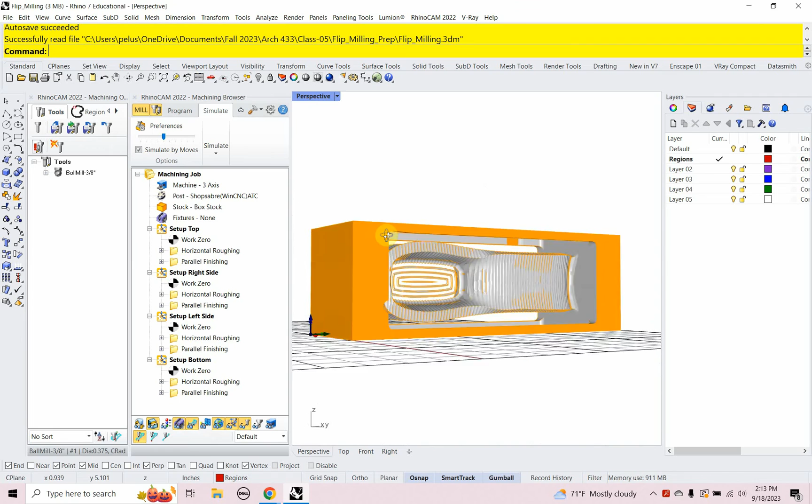Today we're going to look at RhinoCAM flip milling, and we're going to flip mill all four sides of this piece of stock. We're going to be thinking about using foam to mill this wonderful piece out of. So if you don't have a robot arm that has 6-axis capability, you can use this tutorial to flip mill and get all around. Is it 12 axis? Maybe it is 12 axis.

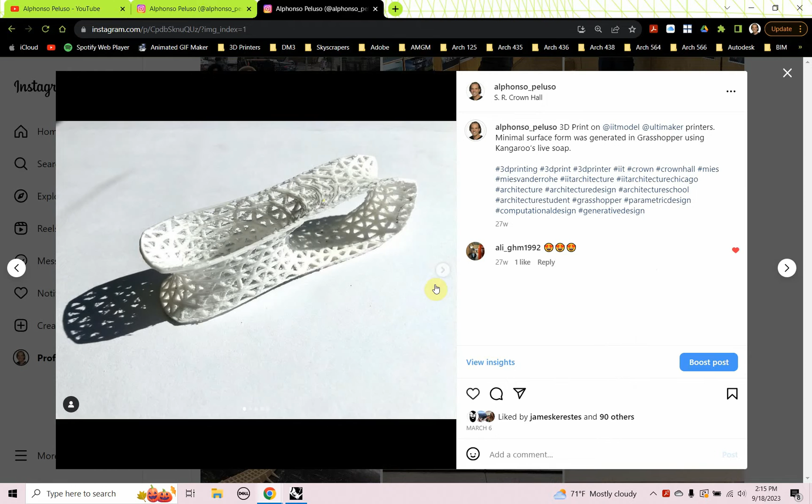Okay, so my inspiration for today was a 3D print I made last spring of a live soap surface that I made in Grasshopper and Kangaroo. So that's the surface that we're going to look at milling out, minus the triangles. All right, let's jump into it.

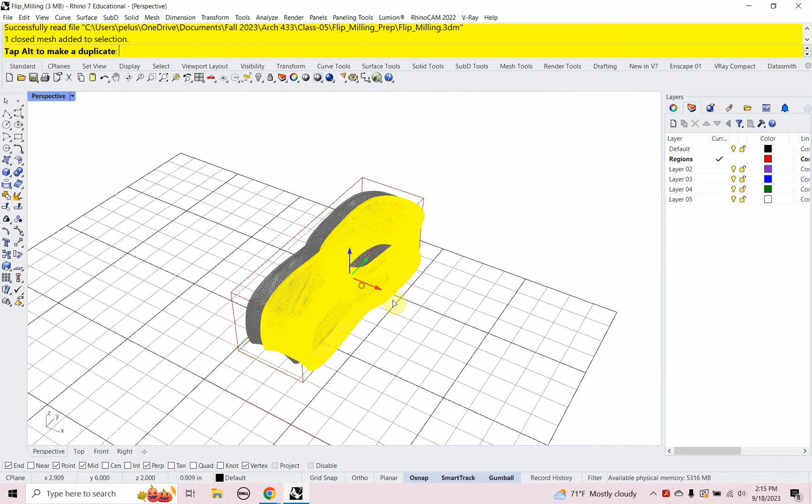Okay, so here you see the finished product. We're going to start out just in Rhino making this awesome flip mill. So I'm going to go ahead for right now and close RhinoCAM and just get us from the beginning, just having this surface here, which is actually a mesh object, which is fine. You can have meshes or surfaces.

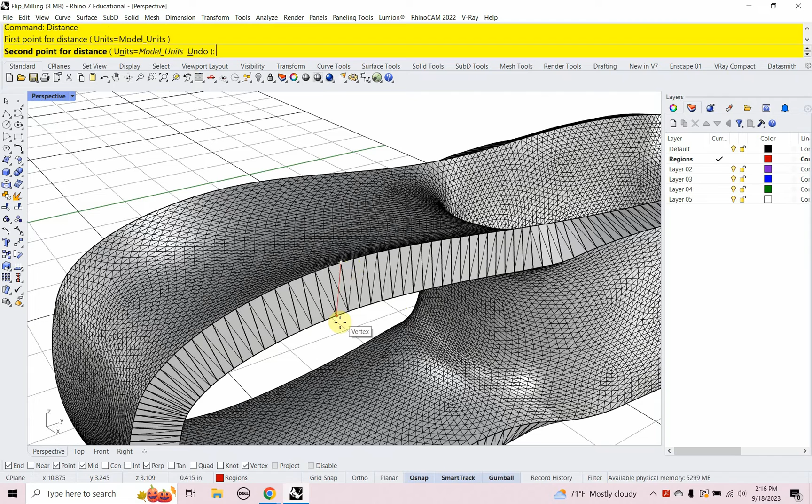So if I make this shaded, we can see what we have, and it has some thickness to it, which you want to have. The thickness on this, let's take a look at it. I'll just use my distance command. And let's try that again. Distance. And let's see, vertex to vertex. 0.4 inches. Okay, so a little less than half an inch thick.

So you want to definitely have some thickness so this thing just doesn't disintegrate and fall apart, because you could make this out of wood. We're looking at making it out of foam today. All right. So let's go. I'm going to save this as a different file. I don't think I've made a folder for flip milling yet. Let's do it now. All right.

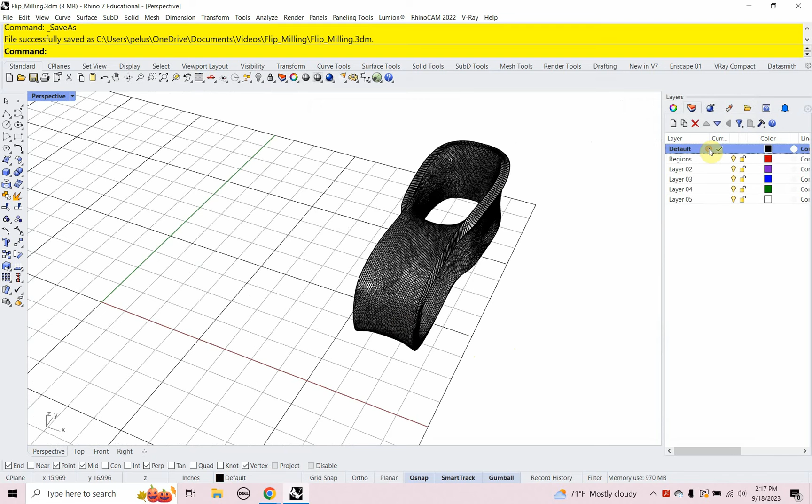All right, so the first thing is we have to get this situated in our stock. The stock has to be larger than the object. I'm just going to make the default layer current. If I take this mesh and I type in bounding box, and I enter through a few of these commands, here's our bounding box. So that's the extents of that object. So that's important to have.

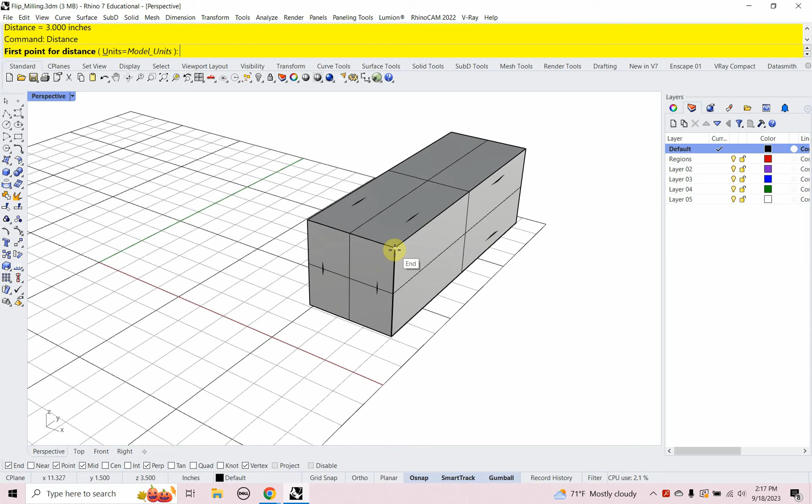So I'm going to just take some distances. So here's a distance in this direction. It's 3 inches. Here's a distance in this direction. It's 3 inches. So it's 3 by 3 in the X and the Z. The X and the Z is 3 inches. In the Y direction, it's 9 inches. So I can put that on a stock that's 4 by 4 by 12. So I'm going to go ahead and make that box that's 4 by 4 by 12. I'm going to make it at the origin, so at 0, 0, 0.

And the base or length, I'm going to put in 4 inches. See if I get this in the right order. And yeah, this length, I'm going to put in my 12 inches. And then the height, I'm going to put in my 4 inches. All right, so there we have that's our box.

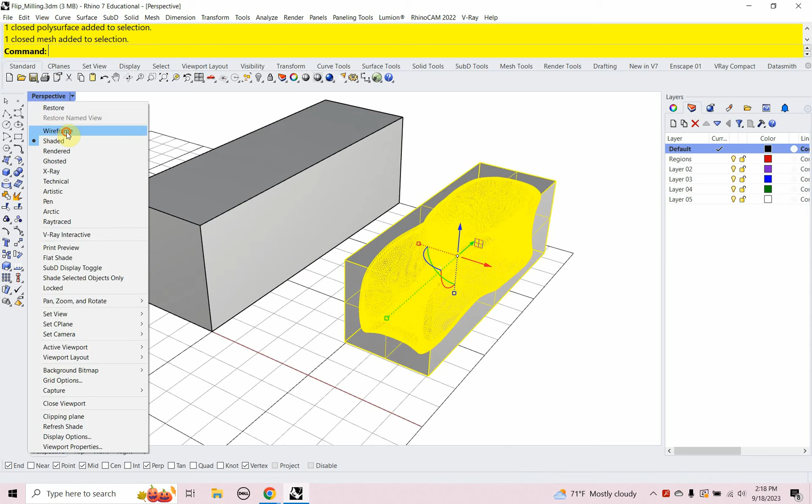That's our stock box. So I just have to take this bounding box and the mesh inside of it and center it in this bounding box. I'm sure there's a lot of ways you can do it. The way that I'm going to do it is I'm going to change my viewport to wireframe, and I'm going to draw a couple lines, one from there to there. And I'm going to do a similar thing on my mesh from there to there.

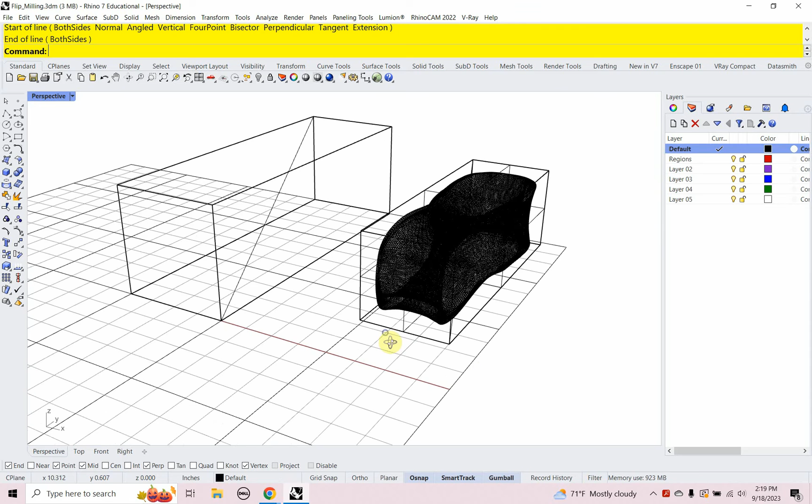All right, let's see if I can get the midpoint to midpoint, even with all that mesh triangulation going. So let's try it out. I'm going to take this, type in move, and instead of trying to snap to the midpoint of that line, I'm going to type in mid, M-I-D, in Rhino, enter, and then I'm going to find the midpoint of that line. And I'm going to go to the midpoint of the other line. I could type in MID again, enter, and find the midpoint. All right, so there we have it, centered, floating in that big bounding box.

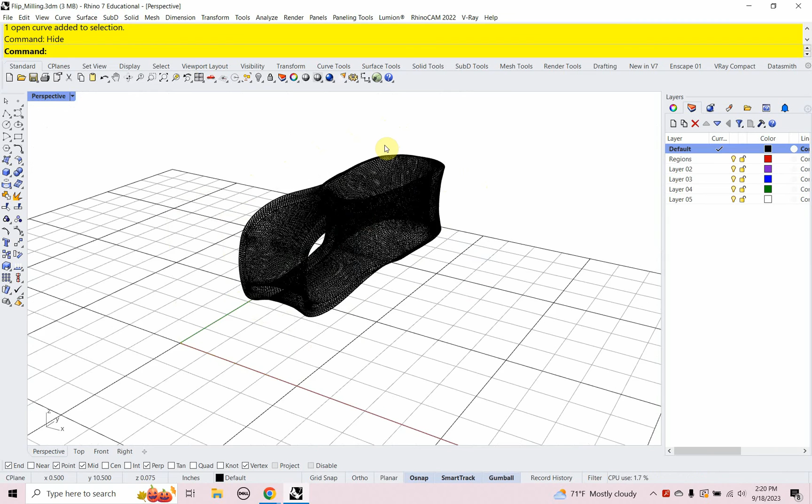So for now, I can hide all of the geometry except for the mesh. I'm not going to delete it because I'm going to want to come back to it. So I'm going to hide this and hide this by selecting it and typing in hide. Okay. All right, we have it centered now, so now we'll start to set up the milling processes.

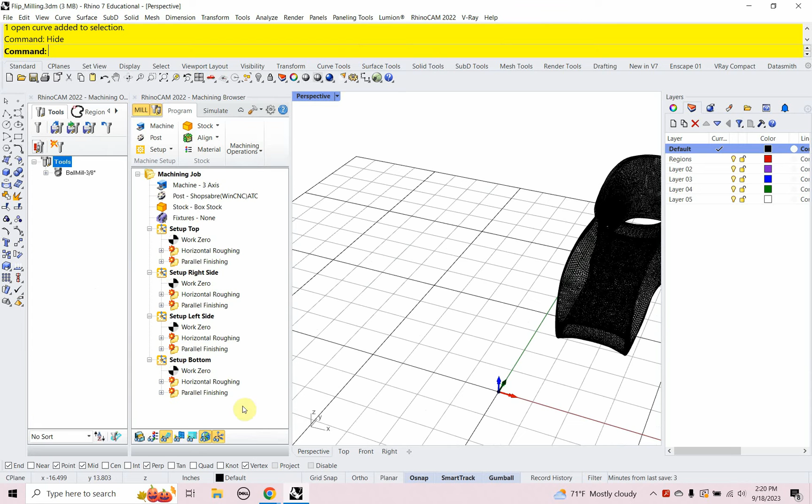All right, awesome. So I'm working in RhinoCAM 2022 right now. I'm going to click on that, and I'm going to choose mill. All right, so it's got all my processes from before. So I'm going to go ahead and just get rid of all that. I'm going to right click and let's see if it lets me do it all at once.

I love this one. Delete all dirty mops. Wow, I haven't seen that before. That is so funny. I'm going to delete all. Delete all dirty mops. I love that. All right.

All right. So machine 3-axis. The post. We're using ShopSabre WinCNC. WinCNC is the name of the software. ATC stands for Automatic Tool Change. That's what we're using in the College of Architecture, IIT's shop. So, yeah, the College of Architecture at IIT, that's our ShopSabre CNC machine. So we have to make sure our post-processing language can be read by the ShopSabre CNC machine.

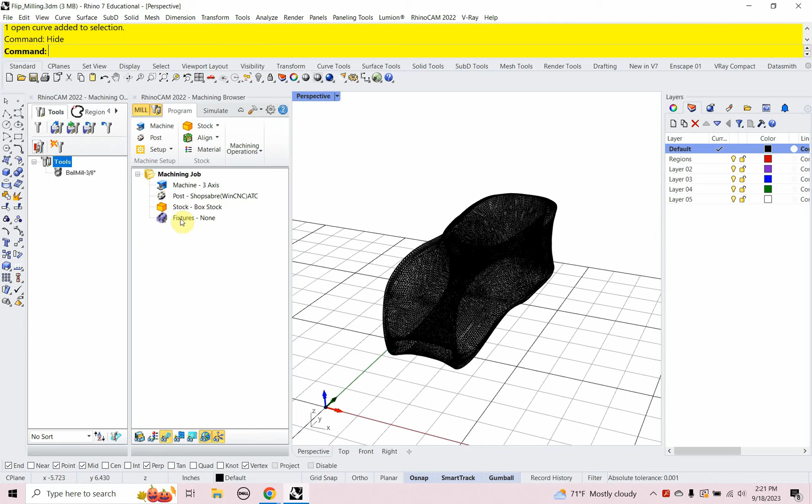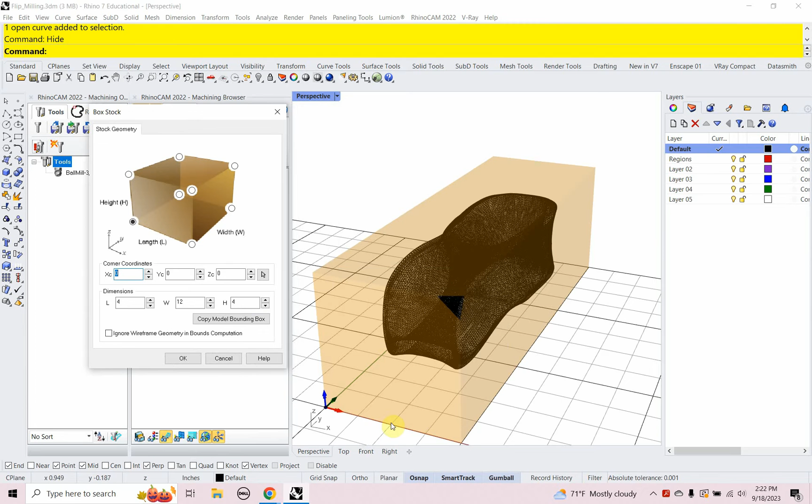All right, the stock. I'm going to double click on stock and look at that. I love when that happens. I have that object hidden and it found it. So that's amazing. So 4 by 12 by 4, that's the size of our stock, and then 0, 0, 0. Now, I'm working a little bit differently than I normally work. If you see my other CNC tutorials, you'll know that I usually make the top of my stock at 0, 0, 0, and this would be down below.

So let's just take a look at that. Let's talk about that. Let's see if I can do this. Move this vertically. Let's see, it's 4 inches what I want. Nope, negative 4 inches. So move this from a point, vertical equal yes. From a point, negative 4 inches. Okay, this is how I normally work. So let's see, let me unhide everything. All right, this is worth looking at, I promise.

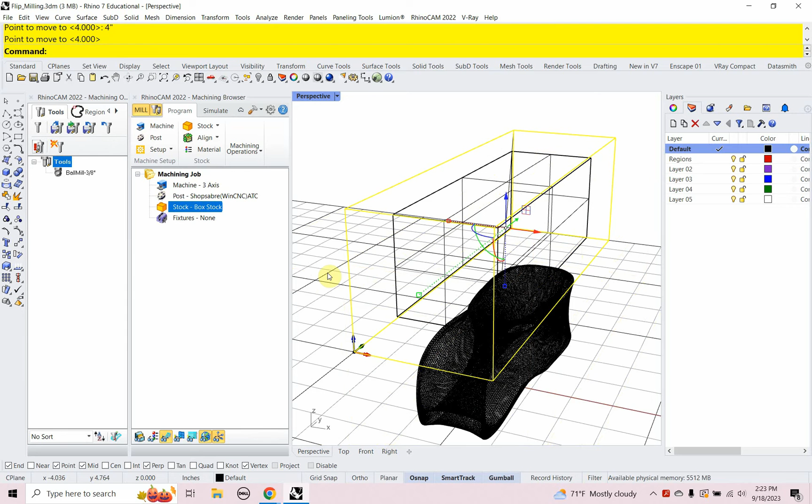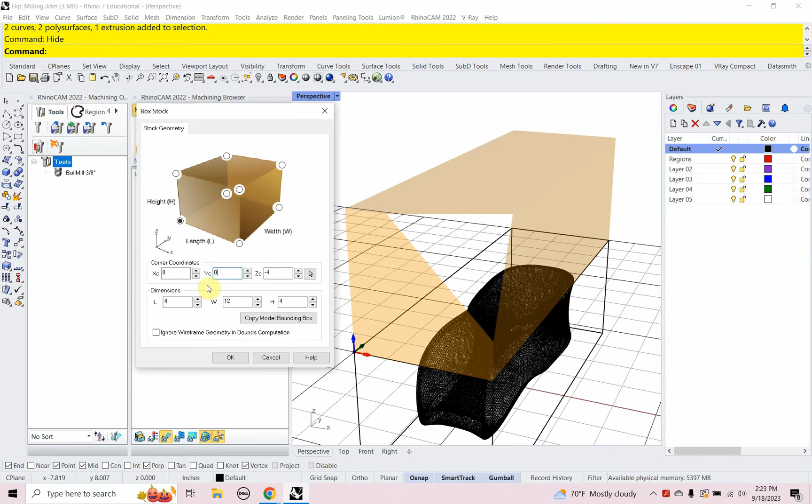Okay, I'm going to take this extrusion and move it down 4 inches. Let's try that again. Move, vertical equal yes, point to move from, -4 inches. All right. I'm going to hide all this. I'm curious what I'm going to get with all this geometry here. Okay, let's see what we find here. Stock. So I'm just going to make my Z -4. Let's see what we get here. Okay, it did work. Just didn't want to update it.

All right, perfect. All that just to show you that this is how I normally work. I normally work with the top of my stock at 0, 0, 0. That's so that I can just go to the top of my stock when I'm setting it up on the CNC and I make that Z0. Well, I can still do that if I change my work 0. If I make the top of my stock work 0, if I make that Z height 0, then I'm all good to go, and we're going to take an in-depth look at that. Okay, so this is how I normally work. Let's see how I'm working today. So let's do some undos. All right, let's check our stock.

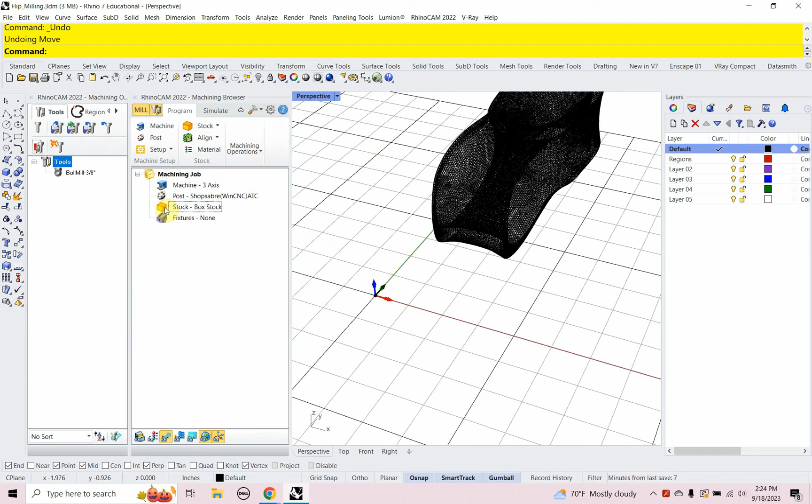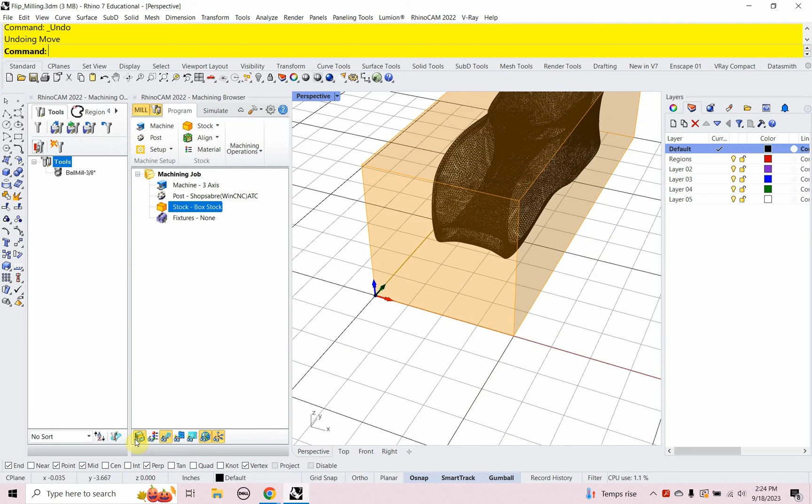It's sitting down there at -4. I want that to be at 0, so 0, 0, 0, 4, 12, 4. Click OK. Let's get that back up there. All right. There's a little button in the lower left right there, so that can show the stock. That was set to off, so I wasn't seeing the stock. We'll work with that today. We'll toggle it on and off, but a good thing to know that.

All right, so there's my stock. And it's 4x4x12 at 0, 0, 0. So what I'm going to set up is my work 0. Right now, my work 0 is down at the bottom of my stock. I want that to be the top of my stock. So I'm going to go to machining operations, and I'm going to choose work 0. We're going to work a lot with this work 0. So I'm going to put that at 0, 0, 4. So top of my stock, and hit generate.

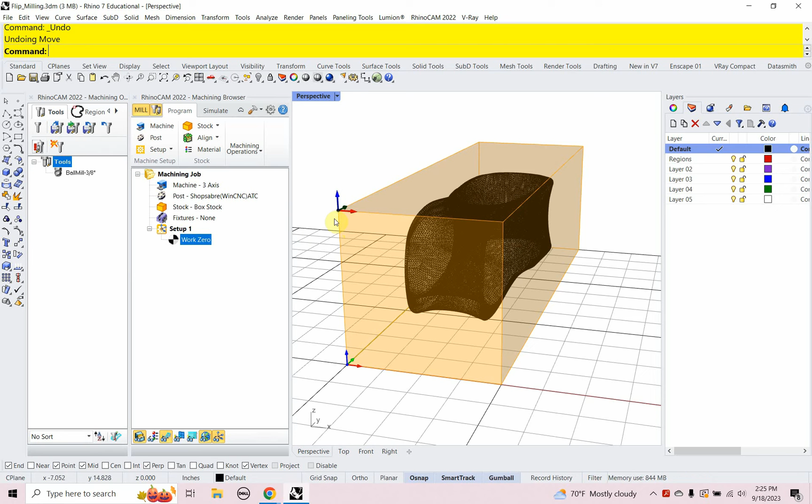All right, so now you see that. There's my work 0. That's the important one. My work 0 should always match the 0, 0, 0 of my part at the CNC machine. So top of my stock at the CNC machine. Lower left-hand corner, top of my stock. So we'll keep that in mind. Lower left-hand corner, top of my stock. All right, so there's my work 0.

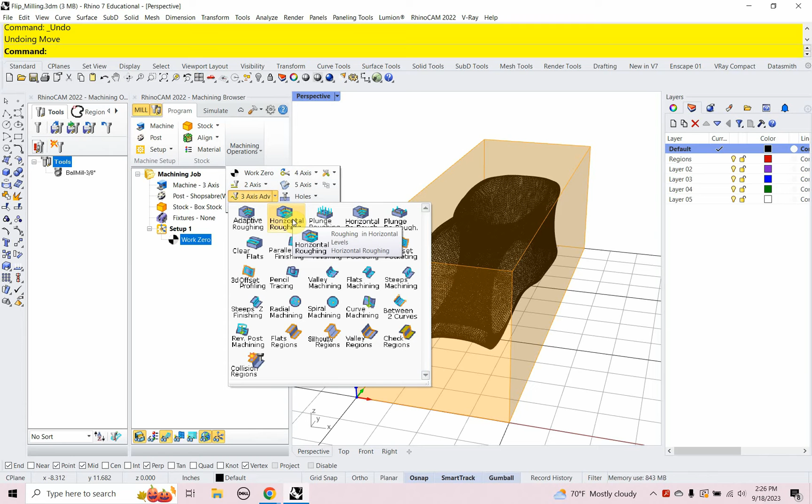So let's set up some milling operations. So I'm going to go to machining operations, 3-axis advanced, and we're going to look at horizontal roughing. This is a quick way to take large amounts of material away very quickly. So it's going to spiral down. That's the pattern of the horizontal roughing. It starts from the top and spirals its way down, and we'll see that working. So horizontal roughing. All right.

We'll set up some regions. That's going to be important. We'll do that in a little bit. But let's look at the tool. So just so you know, it automatically finds the surface. So you've got to make sure you have all your surfaces or meshes hidden, except the surface or mesh that you're going to mill. So let's go to tool, and we're going to use a ball mill 3/8. So that's already been made, but just to go through that.

So edit, create, select tool. I've set that as ball mill 3/8. I've set the tool diameter to 0.375, which is 3/8. The shank diameter to 0.375, which is 3/8. Okay, the tool length, I'm leaving that at 4 inches. And that's pretty much the length of the end mill that I'm going to use, 4 inches. Just need to make sure that my shoulder length and my flute length are smaller than my overall tool length.

All right, let's go to feeds and speeds. So feeds and speeds, I'm setting this per my tool. Okay, so that's already been set up per my tool. So the speed is 16,000 RPM. And I'm going with some more precise numbers than I've gone with in the past. I'm setting something specifically for my plunge, approach, engage, my cut, retract, and departure. And I'm setting these numbers up for foam at the CNC that we're using at the College of Architecture at IIT. So you want to check your CNC settings where you're working that are best for foam.

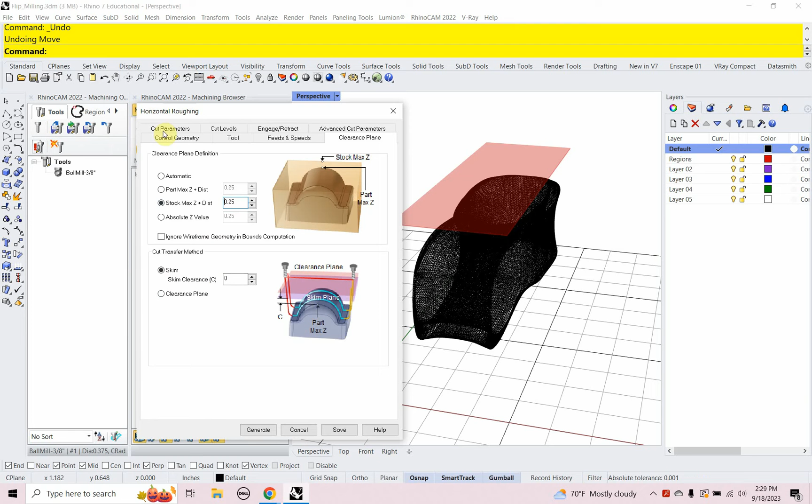Okay, let's go on up to the upper left and let's go to cut parameters. That sends it down to the bottom. All right, cut parameters. All right, so let's look at our step over distance here. So we're going to actually use a distance for the step over, which is 50% of our tool diameter. So instead of putting 50% in here, I'm going to put in distance, and then I'm going to set this to 50% of my tool diameter. So 3/8 is my tool diameter, so 3/16 is 50% of it.

So 3/16 is 0.1875. Okay, and I like to put in the distance just in case I set the diameter of the end mill incorrectly. This will still work for me for my step over because it's in the distance. All right, anything else I want to do here? Just to note that it's leaving some stock material, 0.025. So when you horizontal rough, it leaves some material so that when you come in with your finish process or your finish path, it has some material to take away. So it's leaving 0.025 of stock material.

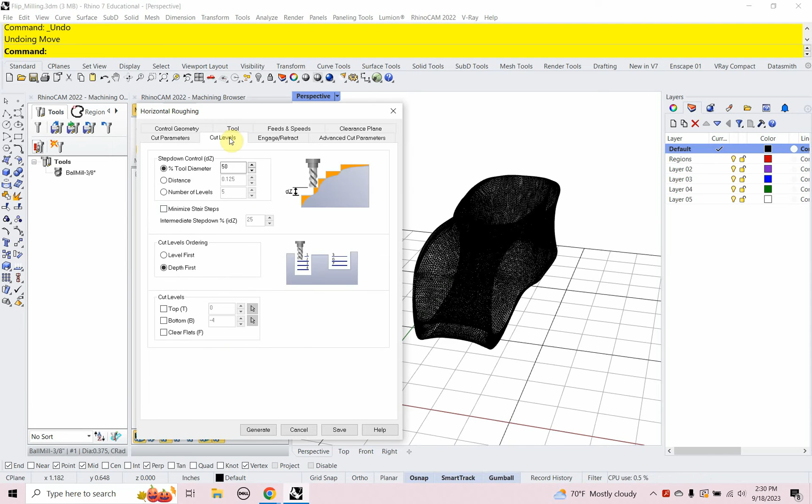All right, cut levels. Okay, cut levels. So again, we're going to step down 50% of the tool diameter. So we're going to step down that same distance, 0.1875, which is 3/16. Okay. And now we're going to go to cut levels. This is an important one. So top is going to be 0. So you see that highlight in green. That's the top. That's the top of stock.

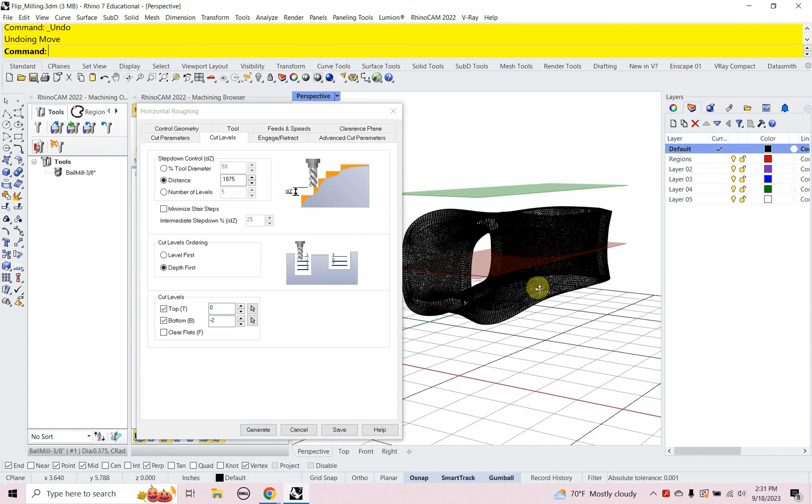Now I'm going to go right down to the middle of my stock. So my stock is 4 inches. I'm going to go right down to the middle of that at -2. So I'm going to check on bottom, and I'm going to put in -2. Let's see that update. Okay, so now you see that. So for each one of my flips, starting with the main one, I'm going down to the center, okay, the centroid of this stock. All right, engage and retract, I'm going to leave. Advanced cut parameters, I'm going to leave that. And let's go ahead and generate this.

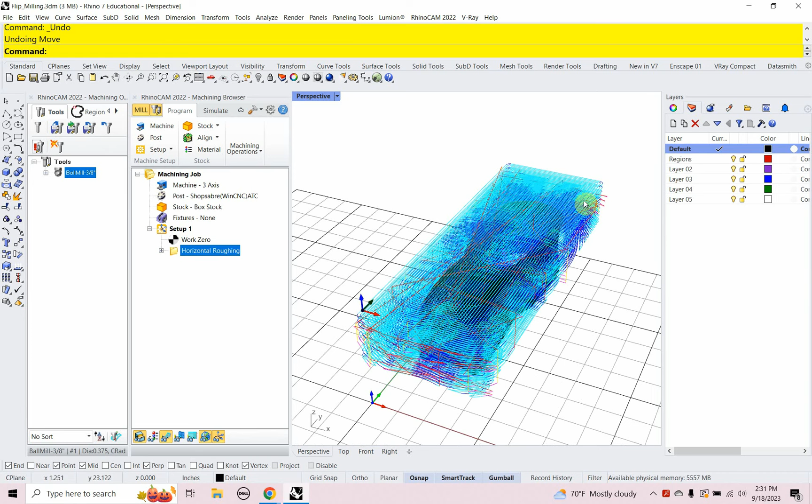All right, wow, look at that. So it's milling, we're going to talk about this. It's milling the entire stock, which is something that I don't want. So if I go ahead and right click and simulate this, okay, I got it going super fast. I can take away the toolpath visibility, okay? So that's this little button down here, and I can actually see it doing the milling.

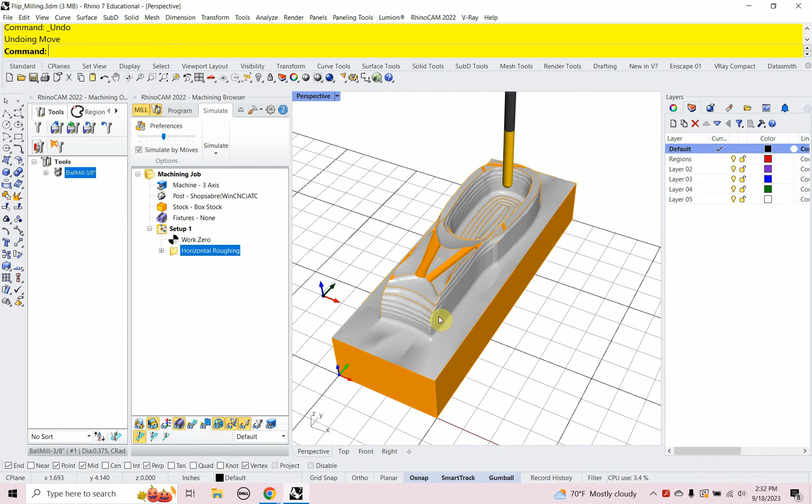All right, this isn't going to work for me because when I go to flip this, say I'm going to flip it 180 degrees, I have nothing for this stock to sit flat on. If I go ahead and rotate it 180, so I'm going to rotate it down like that. Imagine it's sitting on the CNC machine. There's nowhere for it to sit. It's lost some of the stock that I need to be flat, and we'll see that a little more clearly in a second. So I'm going to have to set up a region or regions for my milling. All right, so here's my little toolpath button, I'm going to click keep it on, okay? All right, so a region to mill.

So I'm going to type in show, get all my geometry back. I'm going to go to program. Okay, so I'm going to set up some regions, and I believe I have some set up already. Well, I might have deleted them, which is good. I just want to remake them. Okay, I don't see them here. All right, so I'm going to set up regions. So I have a layer called regions. I'm going to make that current.

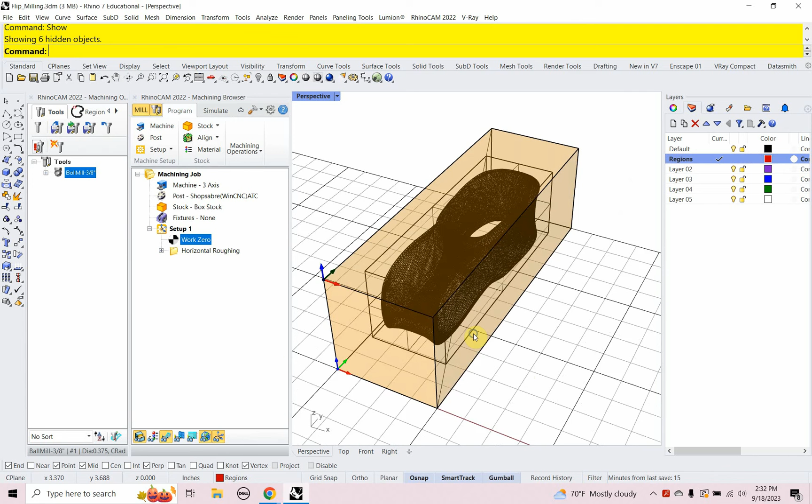And my first region, I'm going to make a rectangle. And that's going to be of that inside box. I don't want to call it stock because it's not stock. It's the inside bounding box of the mesh. So I'm putting the curve on the inside bounding box of the mesh. I'm putting it on the top right now. I'm going to need one for every side, but let's just start with that. Okay, so let's hide the box. I have two of these here. I don't need two of them. I'll get rid of one. Okay, let's hide this stuff.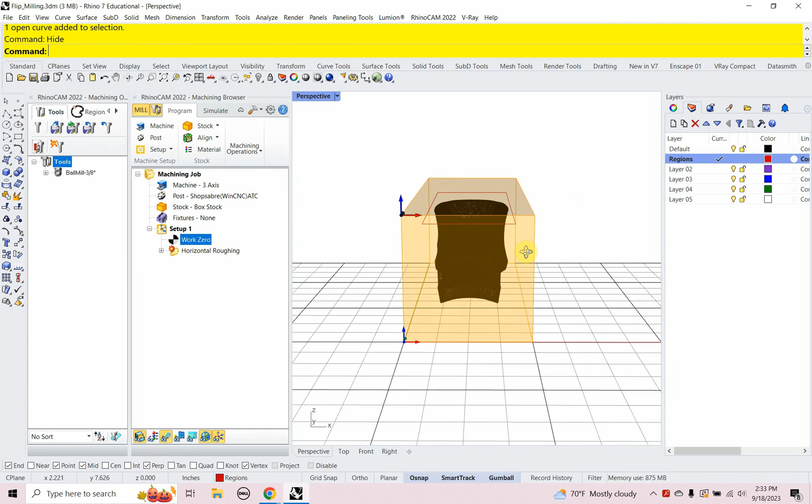Let's hide that poly surface - I think I have two of those there, we only need one. Let's get rid of that diagonal line and hide that. So I have just the mesh and the region, the area that I want to mill in - it's a 2D rectangle. That's the 2D area I want to mill in, and the Z is set by my cut levels that we set at 0 and -2.

Let's go ahead and double click in the horizontal roughing and select curve edge regions. Let's pick this top one, enter. And let's click generate.

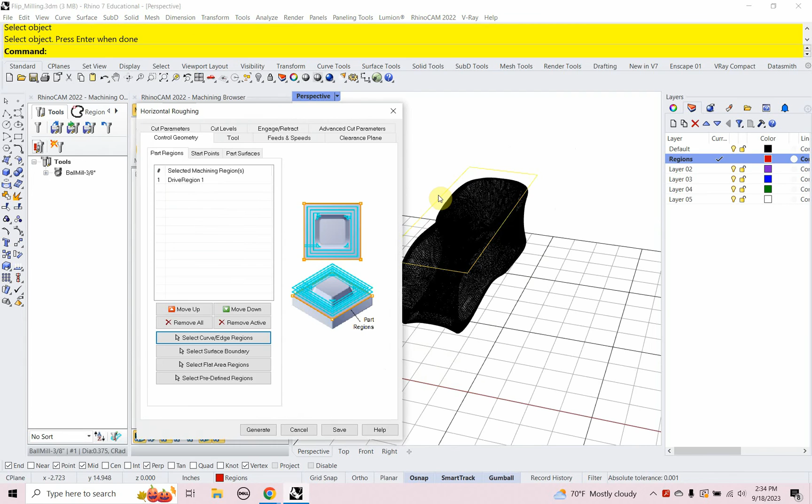Okay, so now you see that the milling is contained in that region. If I go ahead and right click that and choose simulate, you can see... that one's pretty fast, let's do it again. Let's slow this down, all right, slow it down.

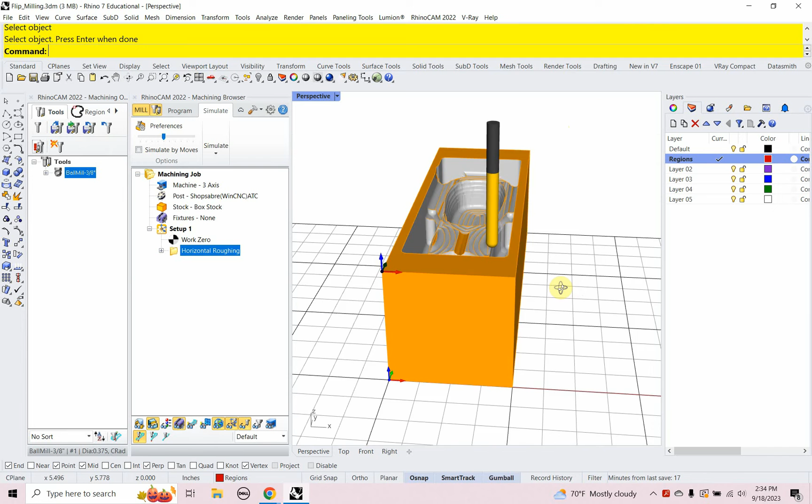So you see that milling, here's the toolpath gone. All right, so that is pretty awesome, just kind of normal 3-axis milling. Now I've left my stock material, enough of that stock material that was at 0,0,0, so that when I flip this upside down, it can sit flat on the CNC. All right, so we're going to keep on going.

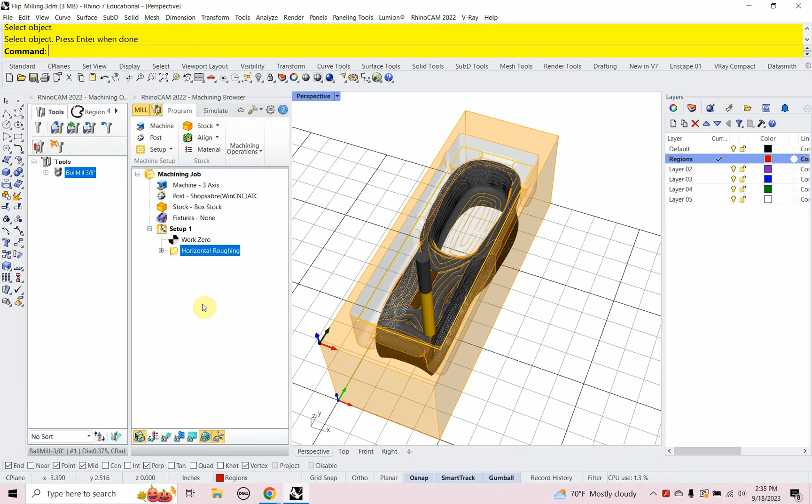So that's horizontal roughing. I want to smooth this out and get better resolution on the milling, and I'm going to do that with a parallel finishing process. I did a rough pass, now I'm going to do a finish pass. So I'm going to go back to program, go to machining operations, 3-axis advanced, and choose parallel finishing.

Okay, it remembers the drive region from before, so that's great. Tool, same tool, ball mill 3/8 - I'm going to use that for both processes. Feeds and speeds, all right, that's all there, I don't have to load from tool. Clearance plane, stock max plus Z, and skim, so it remembers that. We'll see in the simulation if we can actually get it to see the skim at slow motion.

All right, so I'm going to go in the upper left, click on cut parameters. That brings that down. Notice stock is set to 0, so it's going all the way down to my mesh object, leaving no stock left. All right, my step over control.

I'm going to go ahead and do this at a distance, because just in case I set my mill diameter improperly, I'm going to do this at a distance of 0.125, an eighth of an inch. So not super high resolution, but fairly decent.

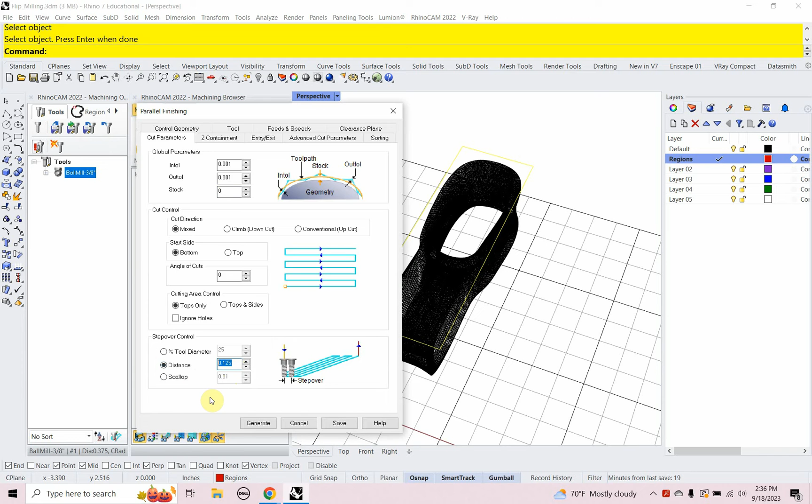All right, let's go to Z containment, and we're going to do the same thing. We're going to specify the highest Z, which is going to be 0, and we're going to specify the lowest Z, which is going to be -2.

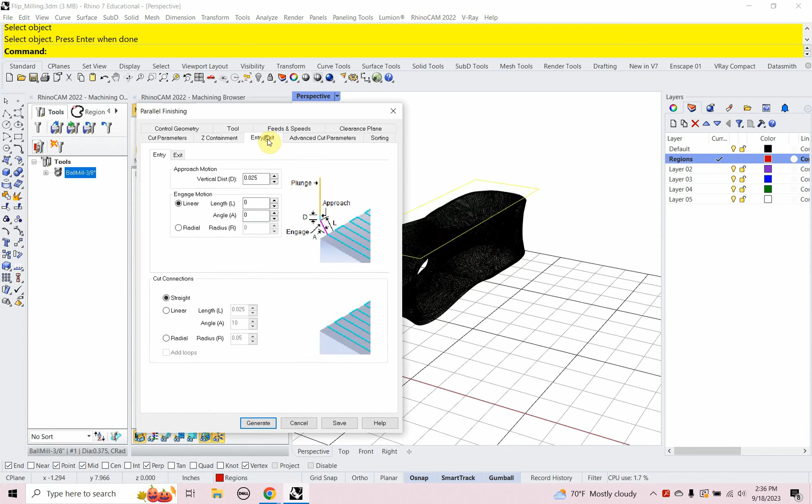Let's see if we can get that to show up there. Probably not until I click out of it, right? Let's go to entry exit, let's go back to Z containment. There you go, so I clicked in and out of it - you just want to check that. 0, 0, and -2, and we're not putting any step down cuts.

So it's going to go right down to the mesh object, the mesh surface, and we'll see that in a little bit. All right, entry exit, we'll leave that. Advanced cut parameters, we'll leave that. Sorting, we'll leave that too. We're going to click generate.

Let's click on our toolpath visibility - there it is, so we see that. And let's go ahead and simulate the parallel finishing. Okay, so you see that going across.

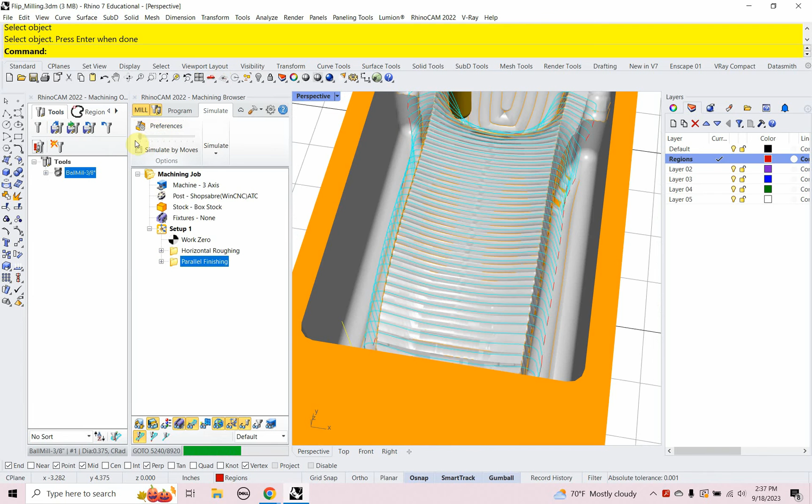So it's skimming - you can see that it's skimming as it's going left to right. I can slow that down even more. All right, there we go, slow motion. So as it moves from one parallel line to the next parallel line, it is just skimming the surface, it's not raising itself up to stock max plus Z.

So we're getting a nice skim cut there. All right, let's speed it up a little bit - it's almost done. All right, so let's turn off our tool path.

All right, so that's one side. We're going to do 4 sides. The good news is we can do some copy pasting, and we're going to just change our work zero. So all the hard work is really done. Now it's really about getting a grasp of this work zero and getting your feet wet with it.

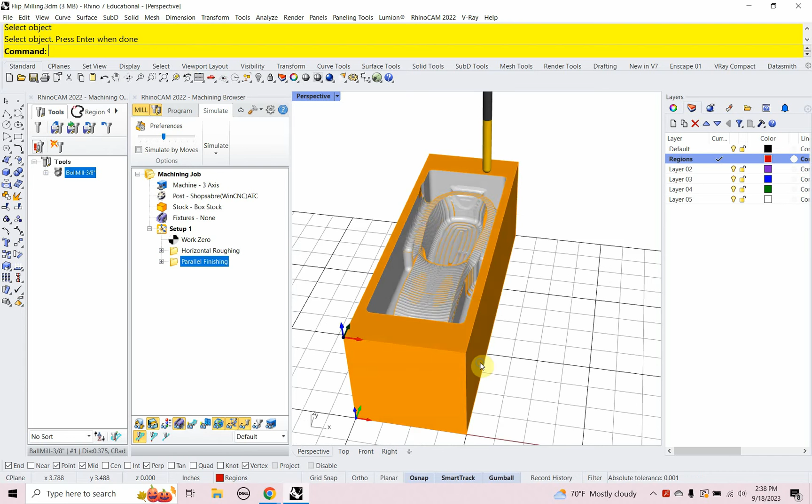So let's do that. I think the way to do this is to first move the work zero, then rotate it. All right, we're going to do the right side.

So setup 1, let's right click and rename it. I'm going to call this setup top. Okay, so that's going to be my setup top.

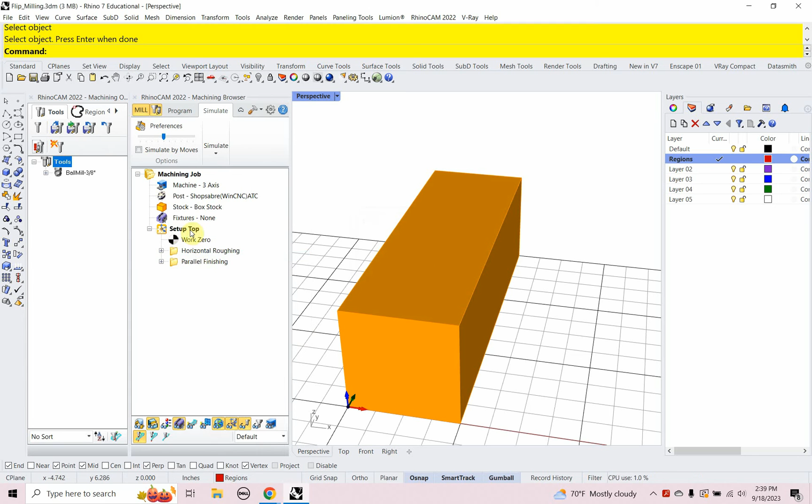All right, setup top, let's right click and choose copy. Nothing selected to copy, so let's select it. I have it selected, let's right click, choose copy. Let's see if this works. Right click, choose paste. Nothing to paste. All right, we'll try it. 3rd time's a charm, how about that? So I've got it selected. There, now it's selected. Right click, copy, right click, paste. All right, there we go, we got it. So you got to make sure it's selected, highlighted in blue, just like that.

So I'm going to select this one, setup 2. I'm going to right click, rename it. This is going to be setup right side.

Okay, setup right side. So my work zero, right now if I click on work zero, it's right here, in the upper left. So I'm going to be flipping this 90 degrees on the y-axis. So this corner right here is going to end up replacing this corner. When I turn this to the left, counterclockwise, on the y-axis, this corner is going to shift over to that corner.

So first thing I'm going to do is move my work zero. I'm double clicking on work zero, and in the x-axis I'm going to put in 4, and click generate. Okay, so there's my work zero.

Okay, so that's perfect. Now I need to rotate that so that Z is going to be in the positive direction. You got to get your head around this a little bit, just got to kind of turn your head. So Z is going to replace where my red x-axis is, Z is going to go there. So I'm going to rotate this 90 degrees about the y-axis.

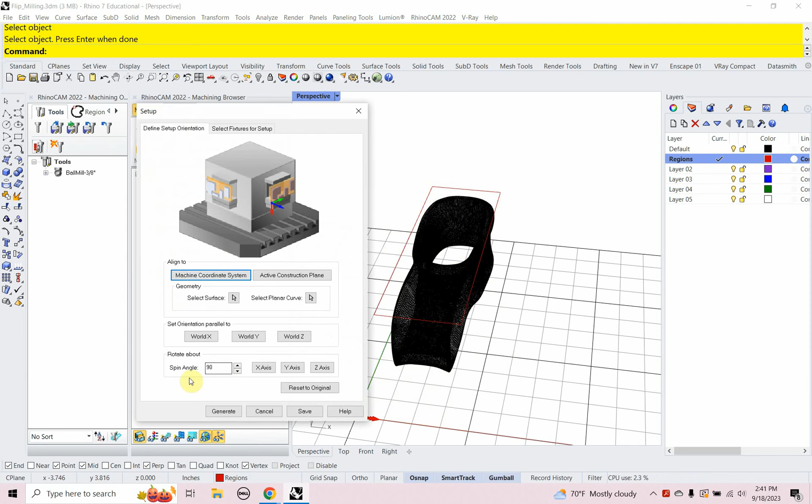All right, so rotating that, I can't do that under my work zero, but I can rotate it under my setup. If I double click on my setup, I'm going to put in 90 for the spin angle, and rotate that along the y-axis 90 degrees. So I'll click on that one time, click generate, and let's click on work zero and see that. There we go, that blue axis is pointing outward. So when this rotates 90 degrees to the left, counterclockwise, Z will be pointed up. Okay, so that's the way you got to think of that.

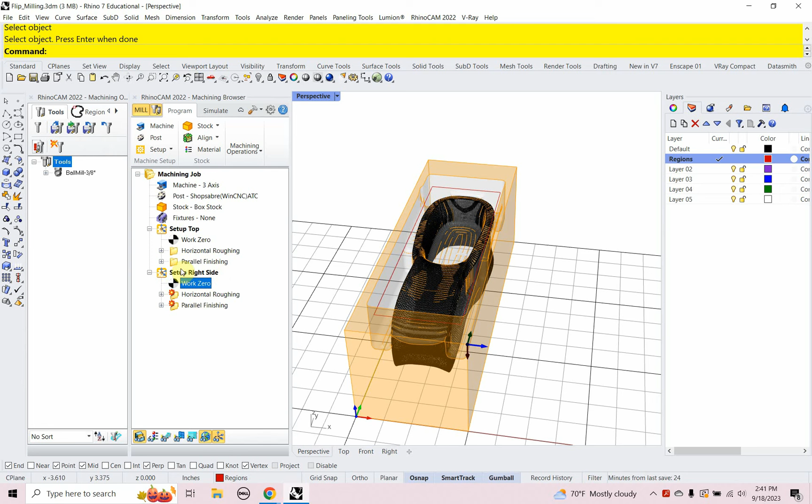All right, so let's go ahead and look at this a little more closely. So my horizontal roughing and my parallel finishing, I'm getting the big explosion there, the explosion symbol. So I'm going to set up my region, I'm going to just go ahead and set that up right now.

So I'm going to type in show, and I'm going to type in rectangle, and just go ahead and make that region. So I got to make, when I make this rectangle, I have to say vertical, and I'm going to go ahead and make that start of edge, end of edge, vertical. Okay, there's that one.

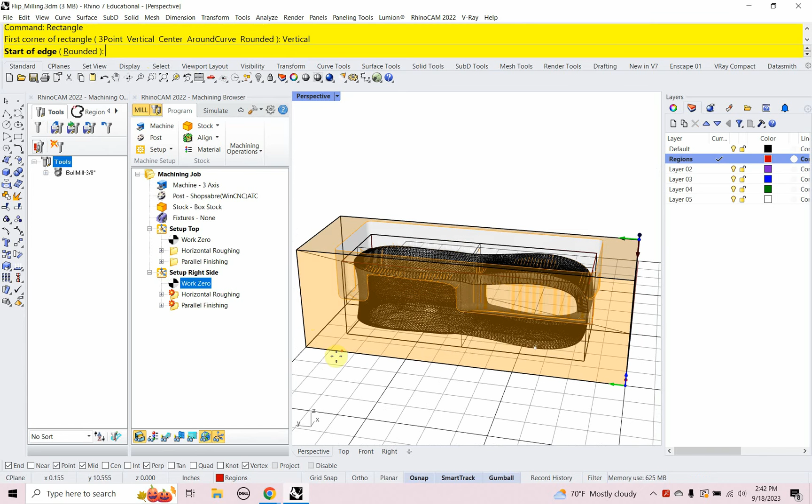So I'm also going to need one on the other side. So let's just make it, let's just make all these right now. Start, end. A little tough to see in there. I think that's all I need. Oh, I'll need one for the bottom too. So let me go ahead and make that one rectangle, that's just a regular rectangle.

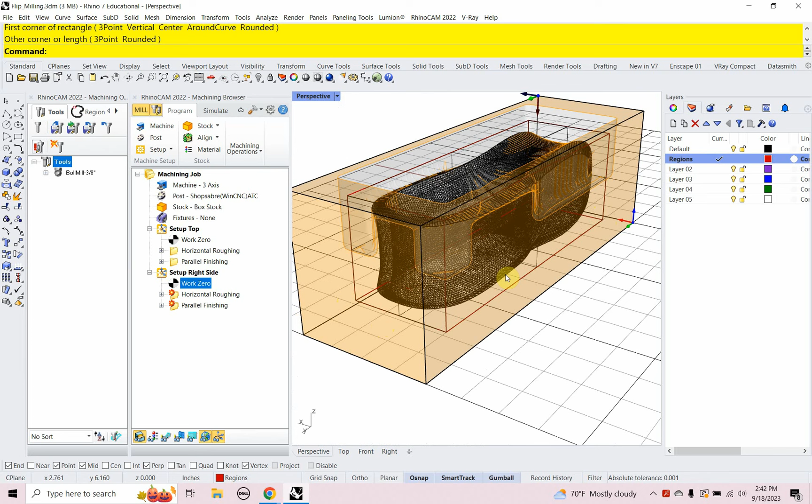Okay, now I'll hide this poly surface, and I'll hide this other outer one. Okay, so no other 3D geometry but the mesh. Let's turn off my stock for the moment. Okay, let's get back to where we can see things. Let's hide those diagonal lines, hide this one.

Okay, so I have a bunch of regions. Those red objects are regions, they're not 3D objects, so I can only have one 3D object that I'm milling.

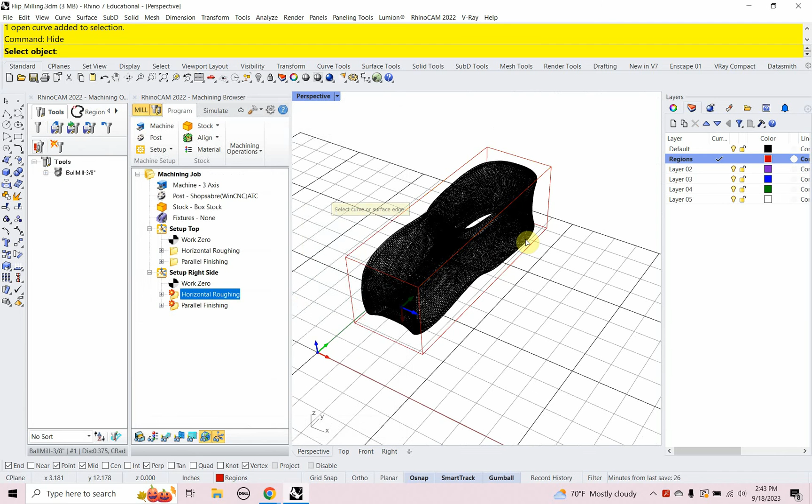All right, so horizontal roughing. I'm going to go in and remove all the drive regions, then select curve edge regions. This is the side one. Press enter and click generate.

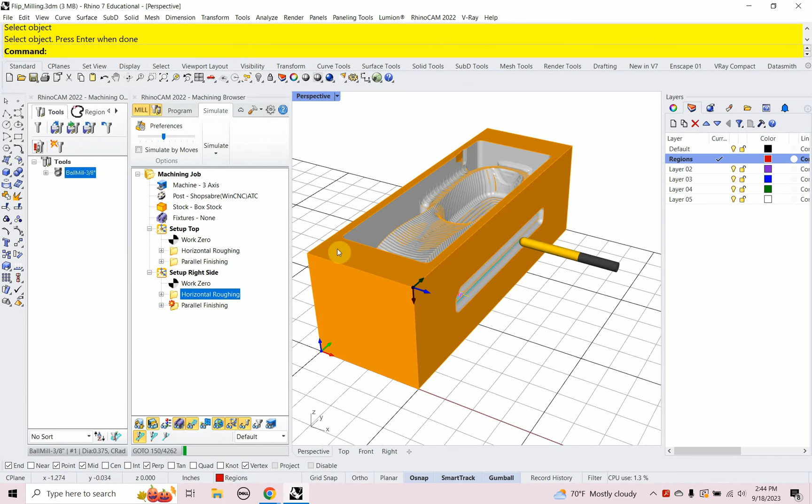Okay, turn my stock on, turn my toolpath visibility on. Let's go ahead and simulate that. So there you go, look at that, that's awesome.

So it's like if this was the top - oh, I don't want to confuse you guys, but I so bad want to angle that the right way. It's hard to flip around in Rhino, there we go.

Okay, so you see the lower left-hand corner is where the work zero is. Z is pointing up, that's if I flipped it. All right, so hopefully you're starting to get your head wrapped around that.

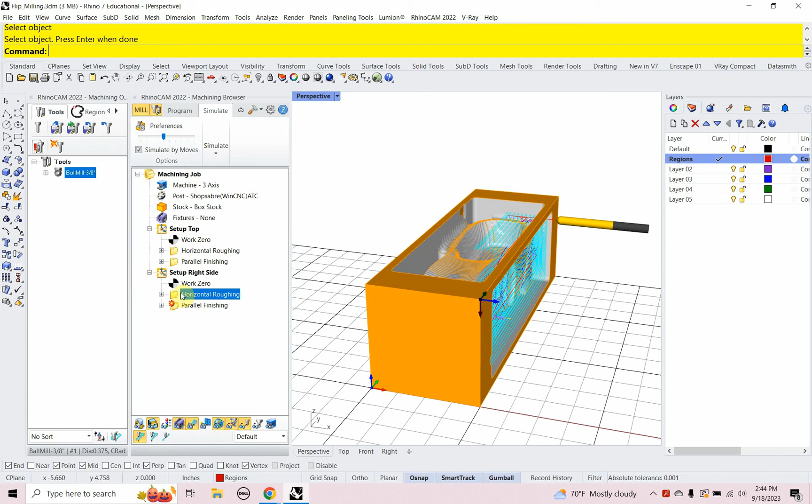So you'll know it's milling from the side, it's milling from the right side. So let's go ahead and let that mill really quickly. All right, we'll take a look at it. Turn off the toolpath visibility so you can see that roughed out with the horizontal roughing.

I don't like that, I don't like that the least bit. So I need to figure out what's happening with that little piece right there. All right, so that's something we shouldn't be seeing in our preview. And we didn't see it in the top.

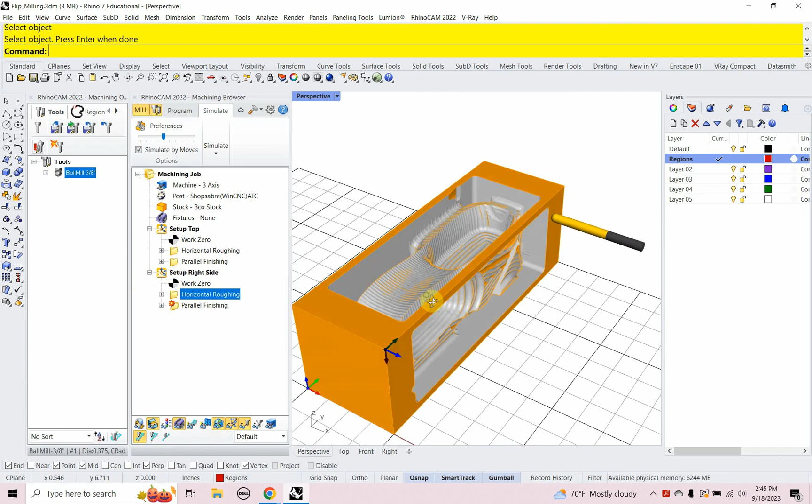All right, so horizontal roughing. Let's see, engage and retract. I don't know, I have to think about that one.

Let's look at our cut levels. So 0 to -2. See those two planes there? All right, so...

We'll figure it out. All right, let's do our parallel finishing. Same thing, I'm going to remove all, select curve edge regions, and pick the outer one. Enter, generate that, and let's go ahead and simulate this whole thing.

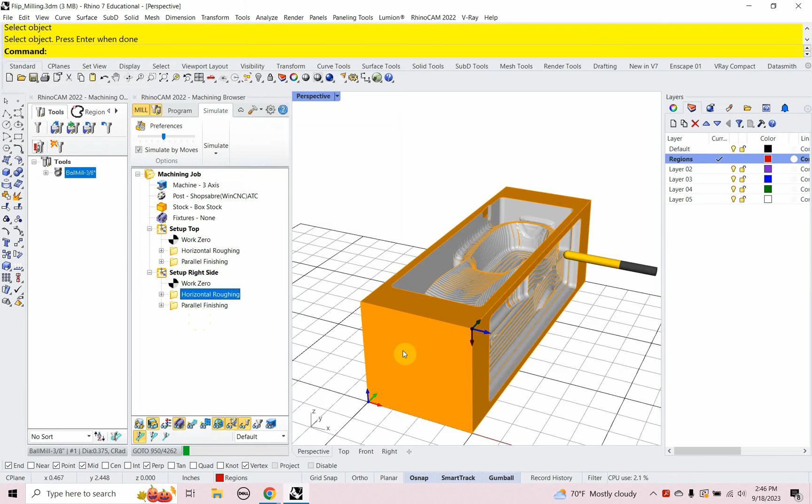All right, so I'm not sure if that's actually going to do that little crossover that we saw, but we'll keep an eye on it.

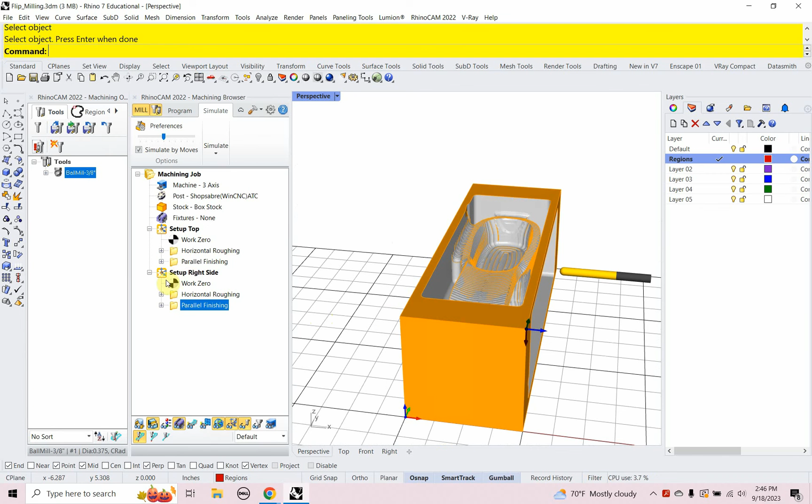All right, so now I'm going to mill the left side. This is getting easier and easier as we go because I have the setup for the right side. I'm going to select it, right click, copy, then right click in the white space and choose paste, and just rename it setup left side.

Okay, and I click on the little plus and it shows the work zero, the horizontal roughing, and the parallel finishing. All right, so for this one we're going to mill the left side of the box. This time we're going to rotate clockwise, 90 degrees, still on the y-axis, but clockwise.

So let's move - well, we don't need to move the work zero because when I rotate this clockwise, this lower left-hand corner is going to become the upper left-hand corner. Okay, so that's working, it's in the right place.

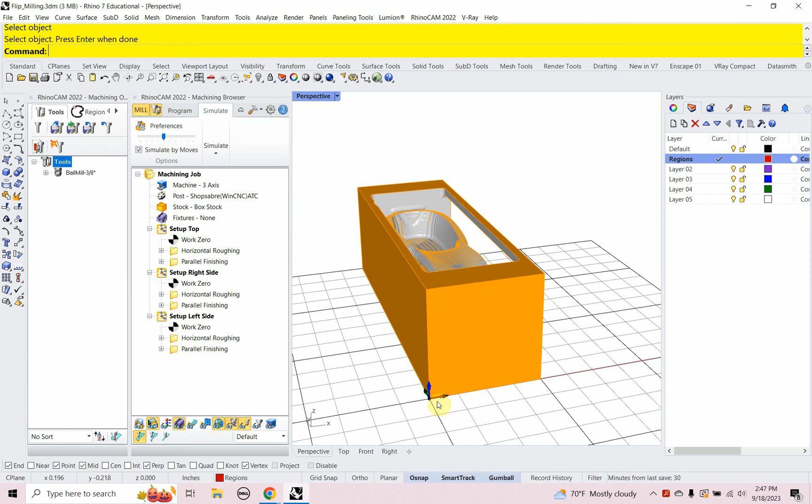Let's just rotate it so that Z is to the left, so that when this rotates, Z will be up. So we've got to rotate about the y-axis 90 degrees. Let's double-click on our setup, and we have this spin angle. I'm going to set this to -90 and rotate that on the y-axis. Let's click generate and see if we get that correctly.

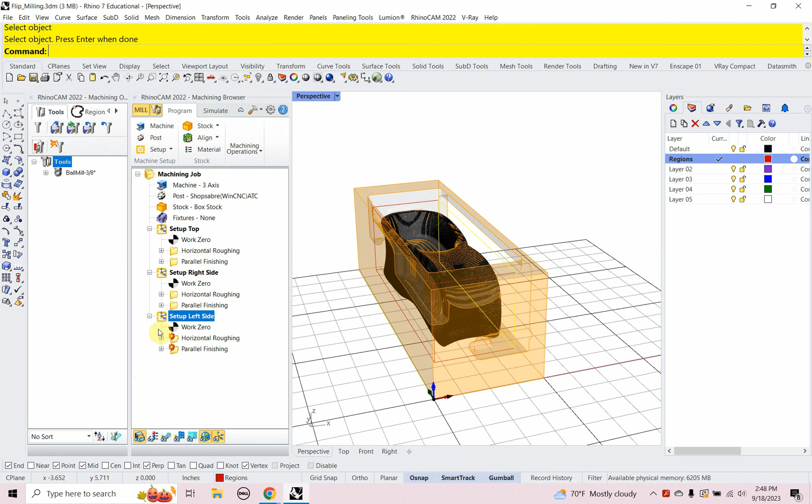All right, so I think it's remembering the right side, starting from the right side. I think I've got to rotate it just another 90 degrees because it wasn't from the world XY, it was from the last setup we made, the setup right side. So let's go ahead and click on that.

And let's do the y-axis one more time. I wanted that to be -90. So -90, y-axis, and then -90 one more time, the y-axis. Okay, there we go, now we see that pointing to the left there. So that's what we want.

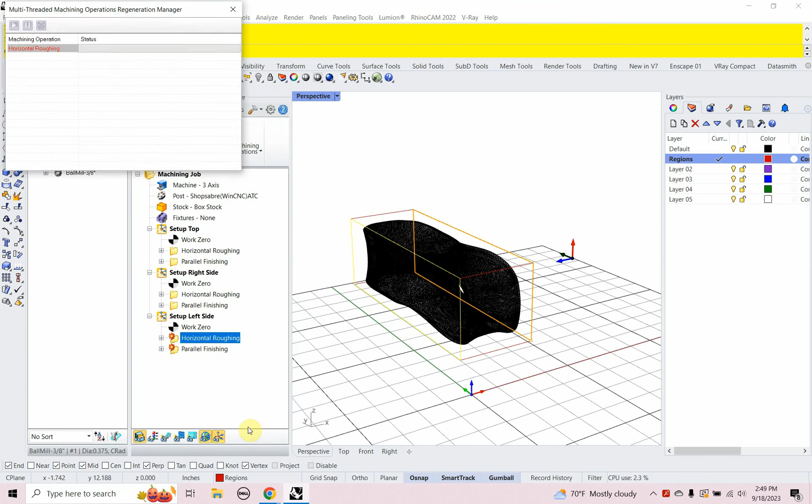Okay, so when that rotates to the right clockwise, that z-axis is going to be pointing up. All right, let's see our horizontal roughing. Let's go in here and remove all, select curve edge regions, let's pick that outer one. Enter, let's generate it. Let's simulate it and see what that looks like.

Oh man, definitely not what we want. So am I excited that this is happening? Not really, but I get to show you guys what's going on with this. So let's figure it out together. What is happening with that? All right, horizontal roughing. Let's stop our simulation.

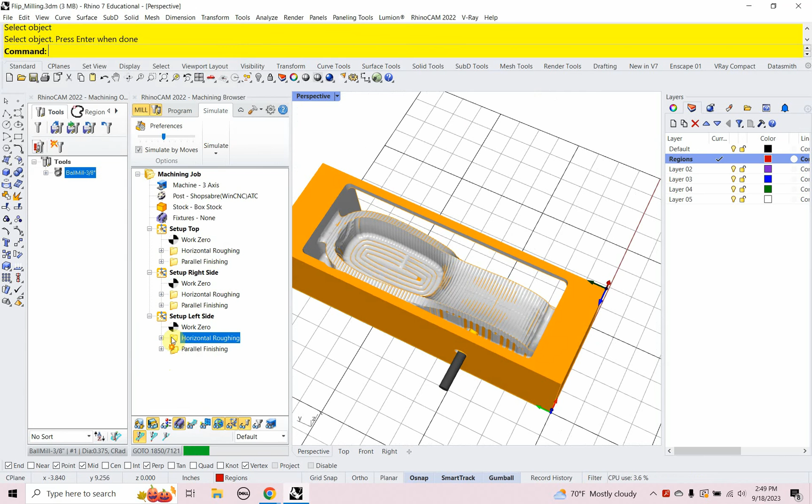Let's double click on horizontal roughing. Let's select the drive region. That looks right. Remove all. Select curve edge regions. It's this outer one. Maybe I selected the wrong curve. Got to make sure it's the side one. I'm pretty sure I did. Enter. Let's generate that. Let's look at the tool visibility, toolpath visibility.

So that's definitely not right. Okay, so the position, something's wrong with the work zero. Let's take a look at it. Let's get this figured out. It looks like the work zero is over here. The work zero is over there when it should be all the way to the left. So let's look at the position of that.

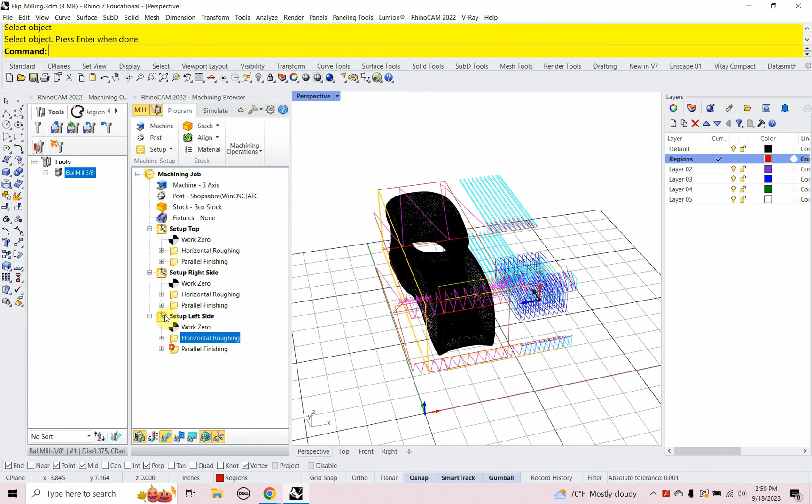Okay, we know the direction is fine. Let's click on work zero. Okay, there we go. We click on work zero. It is in the upper right. We don't want that. That needs to be down here in the lower left-hand corner. So it needs to be at 0, 0, 0. So let's look at that work zero location. Right now it is at 4, 0, -4.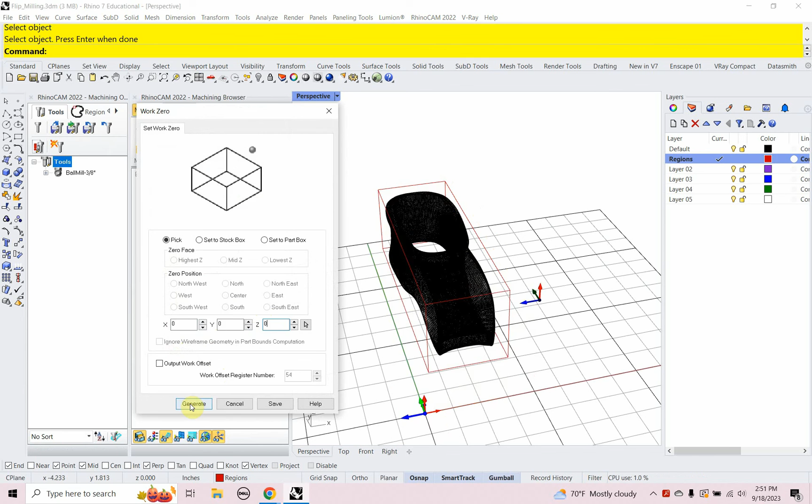So 0 and 0. So I'm kind of glad it happens just so you guys can see, if it happens to you, what to be conscious of. I didn't use my rule of moving the work zero first and then rotating it. So let's click on generate. All right, so now it's in the right location. Let's double click on horizontal roughing, generate that. Okay, now that looks right for the tool path. So let's go ahead and simulate it.

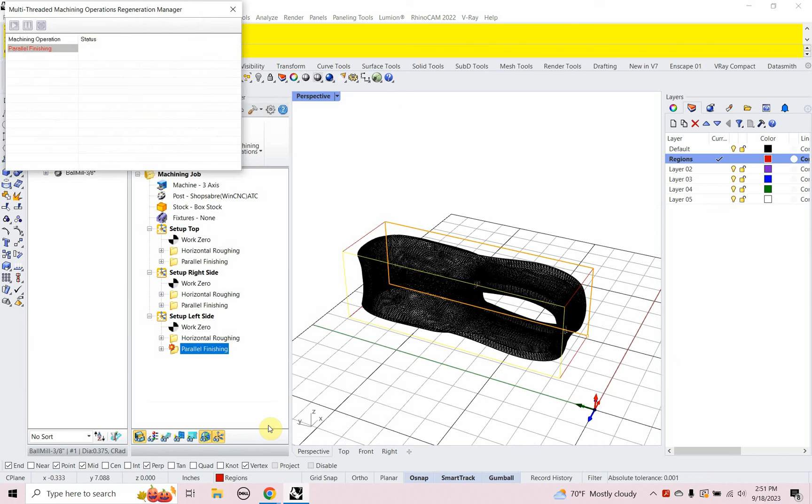Turn off the toolpath visibility. All right, it's looking good. Yeah, I am seeing that going across it. I'm not loving that. Let's go ahead and do the parallel finishing. Let's remove all. Let's select curve edge regions. Is that the right side? Yeah, that's the right side. Enter. Generate that. Let's go ahead and simulate it.

Okay. So that's looking good. We now have our first hole through it. So when we do the bottom, we're going to get a hole right down the middle here.

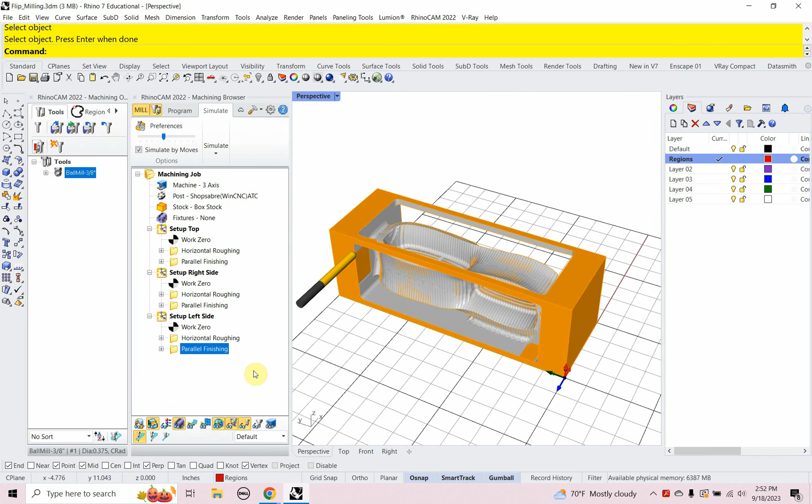All right. Last one, setup bottom. So let's take this setup left side. Let's right click on it, copy. Let's right click in the white space, paste. Click on the little plus to see all the machine operations. Click on setup 4, right click, rename it, and call this setup bottom. Okay, so now it's a matter of our work zero.

So let's try to use our rule of moving it first. Let's click on the work 0 so we can see it. There, now we see it. So I wasn't doing that before. We can click on these and we can see each different work 0. Okay. So that bottom one is sitting at the lower left-hand corner. So I'm going to move it. All right, so where am I going to move it to?

So I'm going to rotate this cube 180 degrees. So this corner in the lower right, if I rotate that 180 degrees, that's going to put it to the top. All right, so let's move it there first. When I rotate this 180 degrees, this lower right-hand corner is going to replace this upper left-hand corner. So let's move it. We're going to move it to 4 in the X. Yeah, 4 in the X.

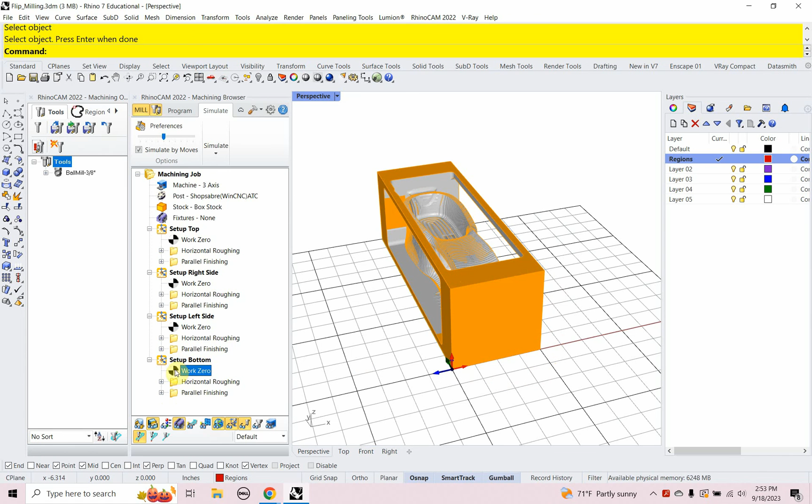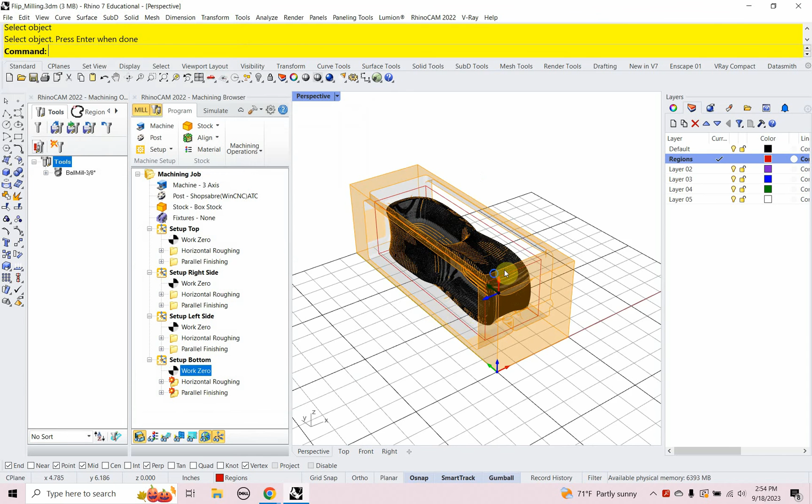Let's move it. All right, so I'm going to click on Setup. Actually, I'm going to click on Work 0. This is for rotating it. So double click on Work 0, and my X is going to be 4. Okay, let's generate that. Okay. All right, so I don't like moving this right now just because the XYZ is all fuddled up. So let's do this one a different way. Let's set up the work 0 at 0, 0, 0.

And let's see if we can get the rotation of it back to normal. There is a set orientation parallel to, so I can go world X, world Y, and world Z. So that's helpful for you guys to see. Just resets everything. Gets it just back to where it was from the beginning. All right, so there it is. The XYZ is all orientated to world. X is to the right, Y is going up, and Z is up in 3D space.

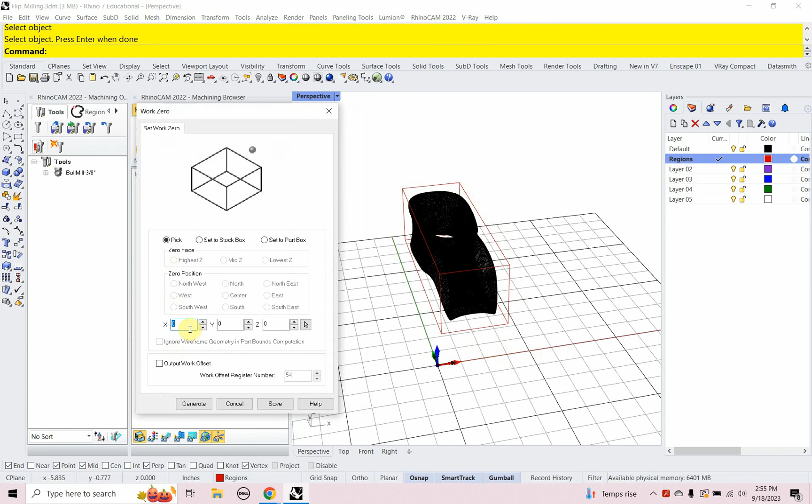All right, so now I'm going to move it to this right-hand corner. So that's a positive 4 in the X. So I'm going to go ahead and click on Setup. Nope, that's for rotating. Click on Work 0 and put in 4 for the X. Okay, there it is. Now I'm going to rotate this about the Y-axis 180 degrees so that Z is pointing down. I rotate my stock counterclockwise or clockwise, doesn't really matter in this case because I'm rotating it 180 degrees.

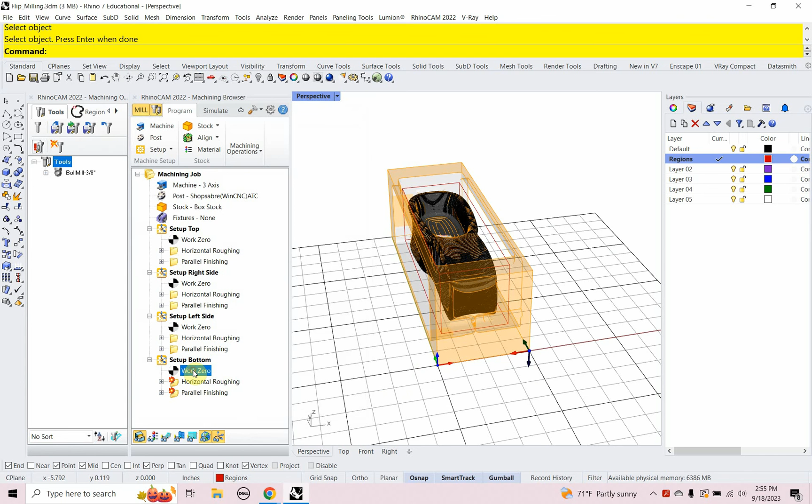So I'm going to double click on Setup, and I'm going to put in 180, and I'm going to click on the Y-axis, and I'm going to click Generate. And let's click on the work 0. So there it is. The work 0 is in the lower right. Z is pointing down, but when I rotate my stock 180 degrees, Z will be pointing up. I know it's going to take a while to get your head wrapped around this. It takes me a while too, and I've done this for many, many years.

All right, let's finish this up. So horizontal roughing, let's do that. Let's remove all. Let's select curve edge regions, and we'll select the bottom one. There's the bottom one. Enter. And let's generate that. And let's simulate it. There it goes.

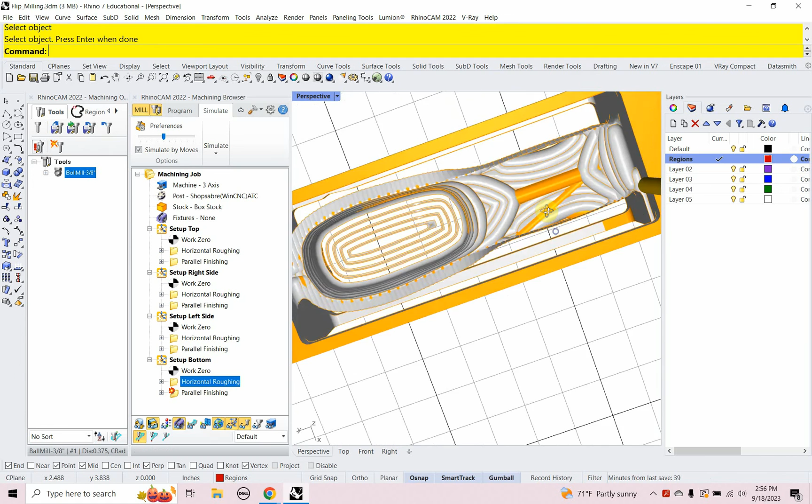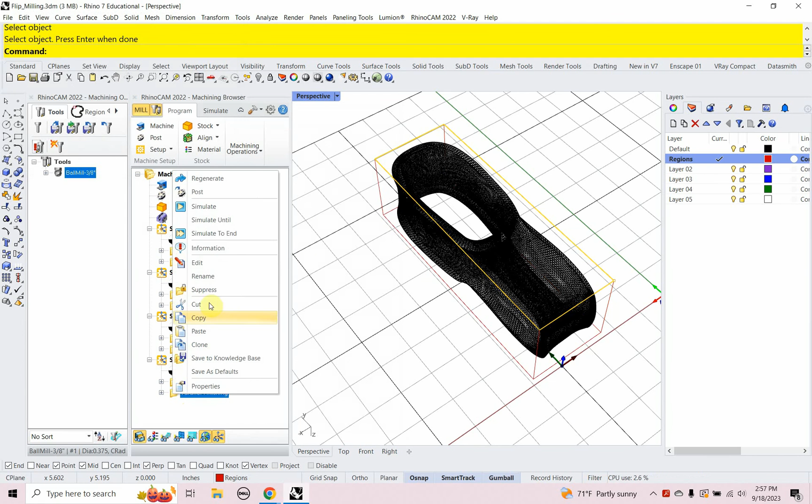All right, keeps wanting to make that diagonal line, and as long as it's not all the way down to the stock, and it's not because we're leaving 0.025 on the stock, and the parallel finishing is actually taking care of that. So let's go to our parallel finishing. Let's remove all. Let's select curve edge regions. I have it flipped upside down right now, so that's the top. Generate that. We'll simulate it. Okay, so that takes out that little diagonal line.

All right, let's go back to our world. Okay, here's our world. World XYZ right here. All right, so that's flip milling 4 sides. That is awesome. And I just want to point out a few things. Okay, so this object that I've milled right now, it's set up in a way that it leaves these little tabs so that this mesh piece doesn't fall out. It doesn't just drop out of the box here.

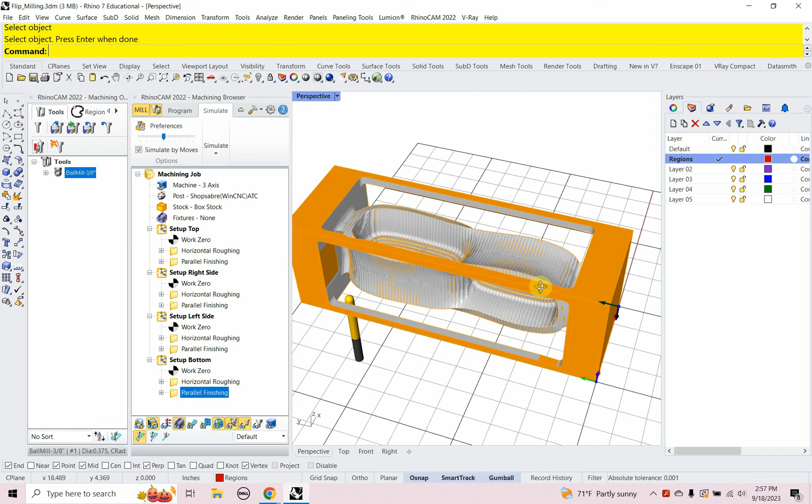So you might have to put in your own boxes, just make a box in Rhino as tabs to hold this in so it doesn't fall out. If you've done the 2D processing like profiling, you can add bridges or tabs to keep it in place. You want to think of the same thing in 3D. This shape just happens to have its own. You can make boxes to keep that in place so it doesn't fall out.

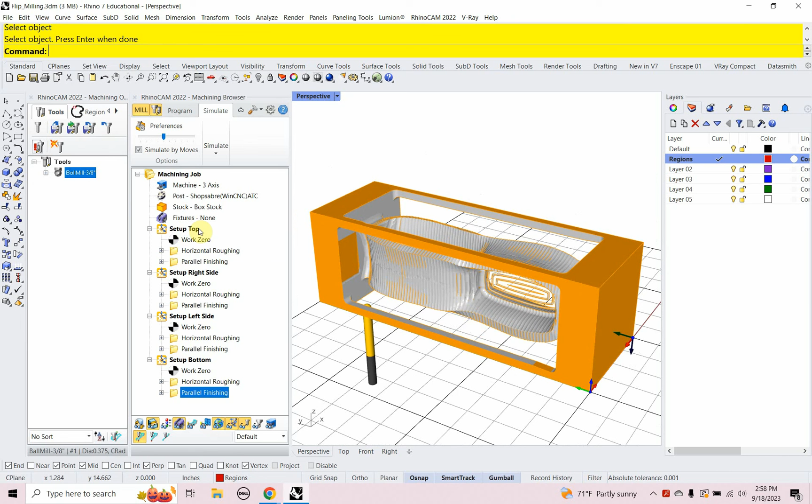The other thing that you want to make sure of is you have to export each one of these now as its own NC code. So you have to right click and export the setup top. So you have to post it. You have to post. I can't post on this because I'm running the demo. So you have to post setup top separately.

It'll be called setup top something, and then you have to post setup right, and then you have to post setup left, and then you have to post setup bottom, because you can't run it all because you have to flip your stock in between each one of these setups. You're going to flip the stock. So you got to have them all as their own separate NC files. So you want to export all 4 of these.

So naming them is really important, and then keeping track of them and having the right file to open. So you got to just be a little bit more conscious when you're at the CNC machine to which setup you have open and what you're milling. All right, I'm just trying to think if I missed anything, if there's anything else that I want to show you. I think that's everything for this flip milling. Awesome, excited to see what my students can do with this.